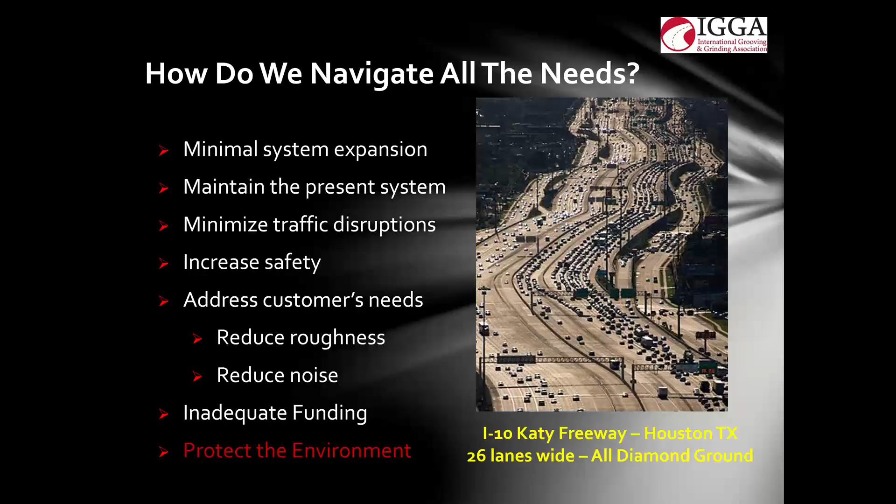In addition to that, while we're doing that, we're asked to minimize traffic disruptions, increase safety, make sure the customers are happy, give them a smooth road, a quiet road. And all the while, we're doing this with inadequate funding. And oh, by the way, yeah, let's protect the environment, which of course is quite important to all of us, I'm sure.

So many transportation departments are turning towards the pavement preservation philosophy, which is simply put, keeping good roads in good condition. And lucky for all of us, there is a robust toolbox full of tools that allow us to preserve our concrete pavement. And I'll just touch on them briefly before we dive into the grinding and grooving.

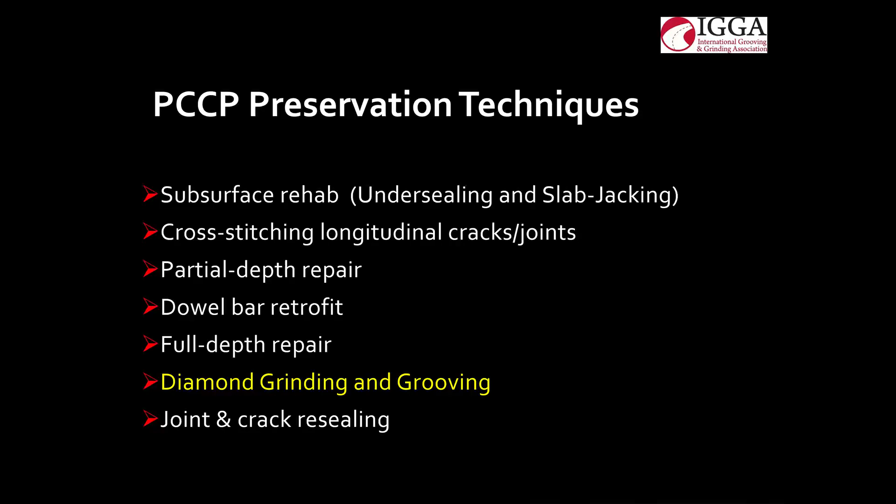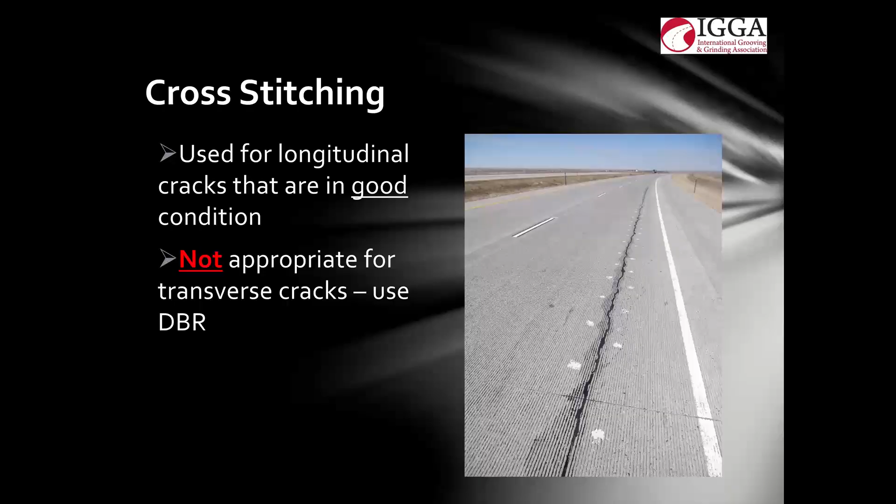There's pavement subsurface rehabilitation used for subgrade repair. There's cross stitching, which we use for longitudinal cracks that are in good condition. Note, not appropriate for transverse cracks. More on that later. Partial depth repair used on surface defects and joint spalls. Full depth repair we're all familiar with, removal and replacement of concrete, full depth.

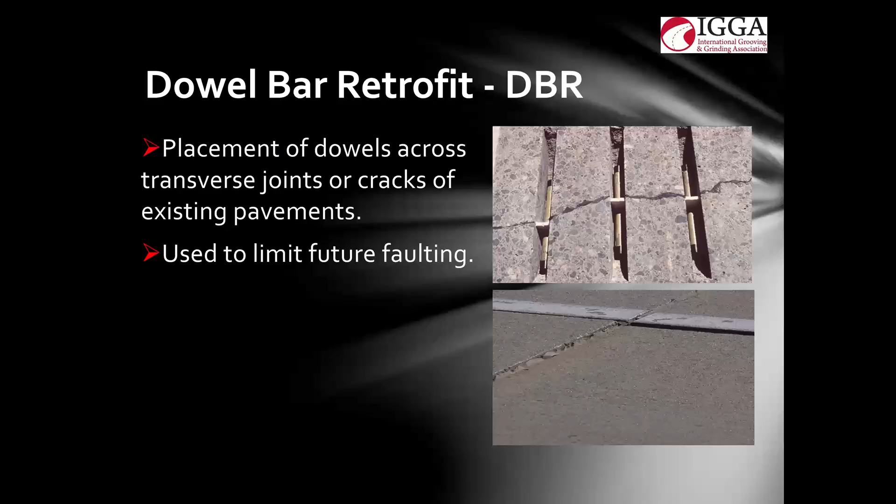And dowel bar retrofit, the placement of dowels across transverse joints or cracks of existing pavements used to limit future faulting. And then there's joint and crack resealing, which minimizes water and incompressibles entering into the pavement system.

Increasingly, we see specifiers using diamond saw cut surfaces to reduce roughness, noise, increase the friction, extend the life of their pavements, bridges, tunnels, and runways. And there's a number of reasons for that. It's economical, long-lasting, effective, and environmentally friendly.

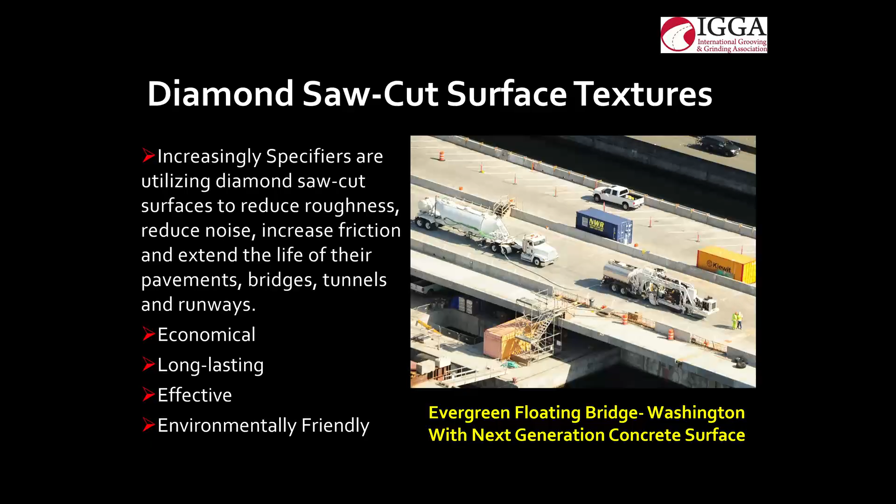Think about it, whenever we're using any diamond saw cut surface texture, we're not requiring any additional aggregate or materials coming from nature other than fuel. What we're looking to do is just simply refinish the top, make it functional, make it smooth, make it last long. There's three diamond saw cut surface textures that we tend to talk about.

Diamond grinding being the first, which is a process that ends up leaving a texture that looks almost like a corduroy fabric. It not only smooths out the pavement, but provides us with a low noise surface and increased macrotexture, making it a very safe surface when used on a good quality aggregate. And then there's the next generation concrete surface, which we really won't touch on here today in my presentation, but you will hear more about that later in the program.

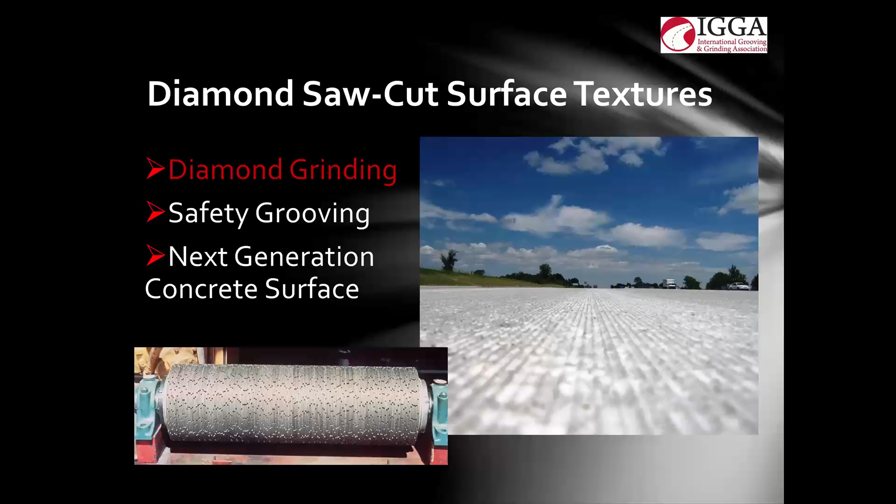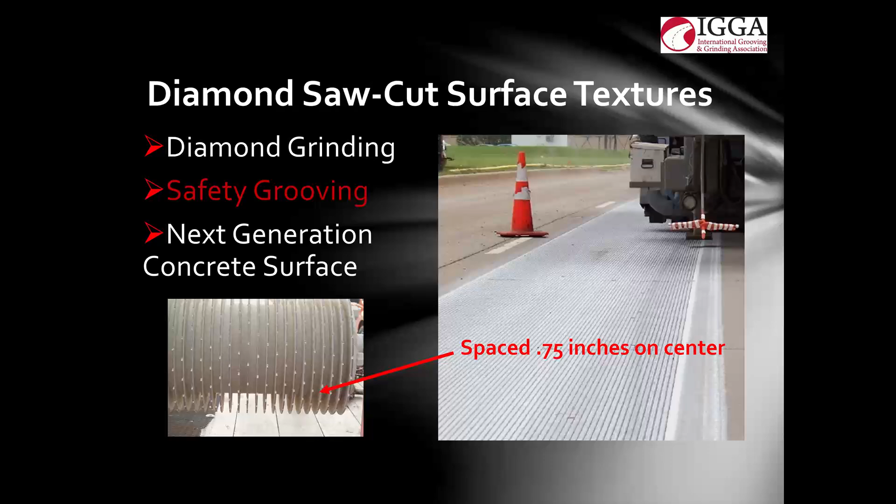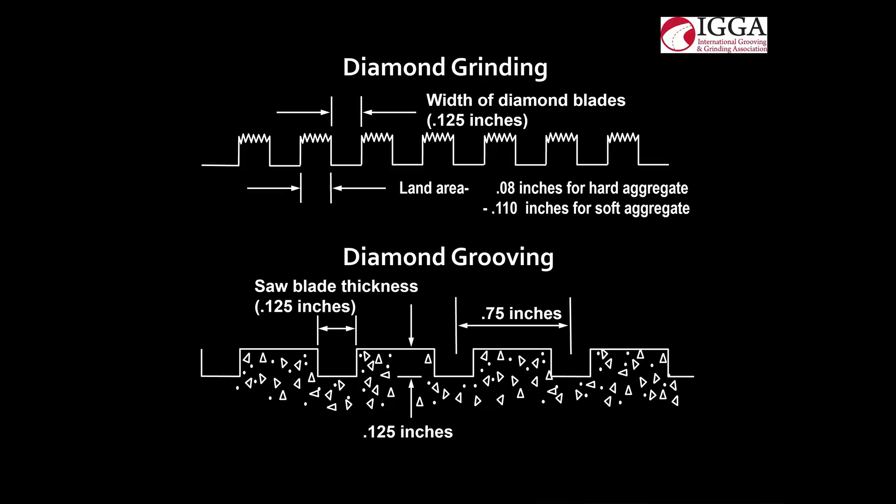And the concrete breaks off on a level surface, and hence we get the smooth texture, and again, the low noise signature and increased macrotexture, providing us with a safer roadway. If we look at the bottom of the cutout, we'll see diamond grooving. And again, you can see the 3/4 inch centers, the same blade, 125 thousandths about, but we're not impacting the land area, thereby not impacting the overall smoothness or the noise signature of the pavement.

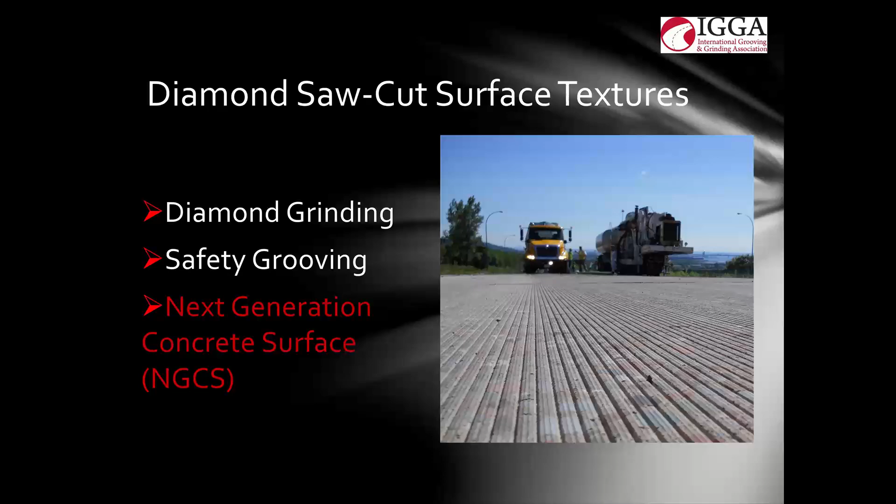And then there's the next generation concrete surface, which again is a topic you'll hear a little more about later in the program. And it's basically a hybrid combination of diamond grinding and safety grooving. So there's a lot of advantages to saw cut textures. The costs are competitive and really stable over time. The price has not increased greatly over decades.

It enhances smoothness, surface friction, and safety, and noise signature, all in the same pass. So whether you're looking for smoothness or you're looking for friction, you're getting them both. It can be accomplished during off-peak hours with short lane closures. And texturing of one lane does not necessarily require grinding of the adjacent lane. So you can take those scarce dollars that you have and focus them in the areas that really require the attention.

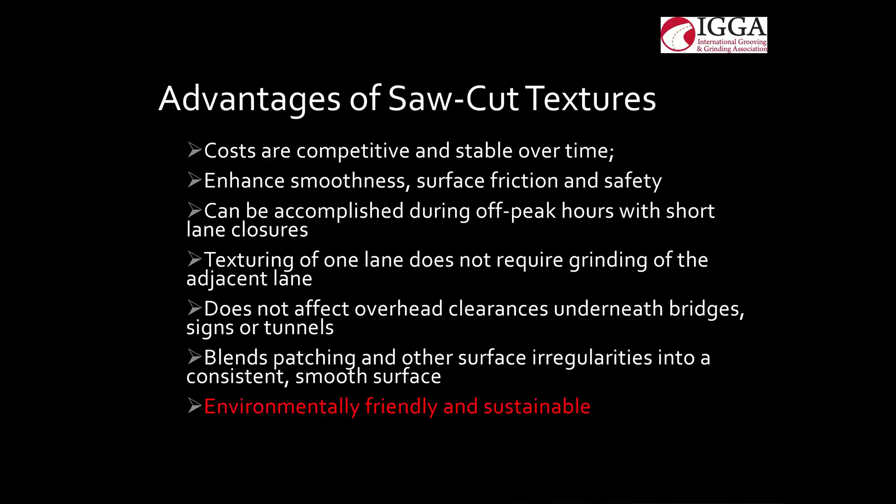The saw cut surface textures don't affect the overall overhead clearances under bridges or signs or tunnels, and it allows you to blend patching and other surface irregularities into a consistent, smooth surface. And as mentioned just a minute or two ago, it's environmentally friendly and sustainable. We're not ripping it out, we're not tearing it out, we're not putting something on top. We're simply going to refinish what we have in place.

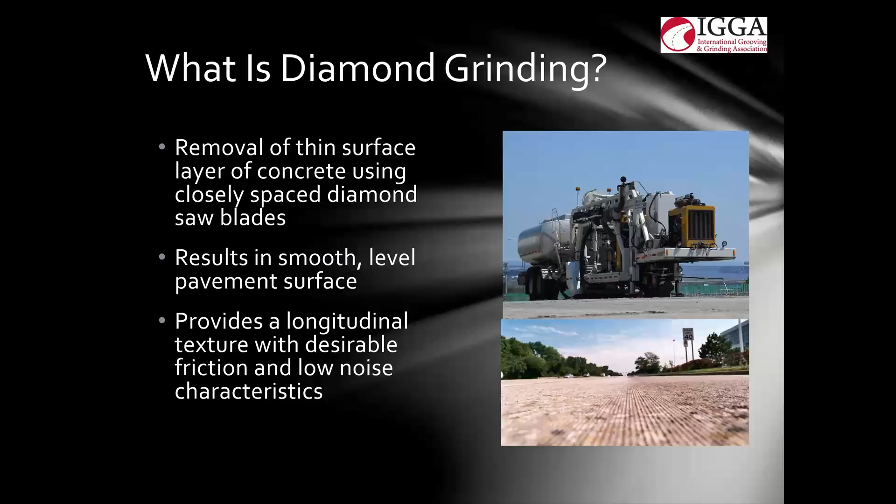So what is diamond grinding? It's the removal of a thin surface layer of concrete using closely spaced diamond saw blades. It results in a smooth, level pavement surface and ends up with a longitudinal texture with desirable friction and low noise characteristics. There's a number of problems that can be addressed using the diamond grinding process.

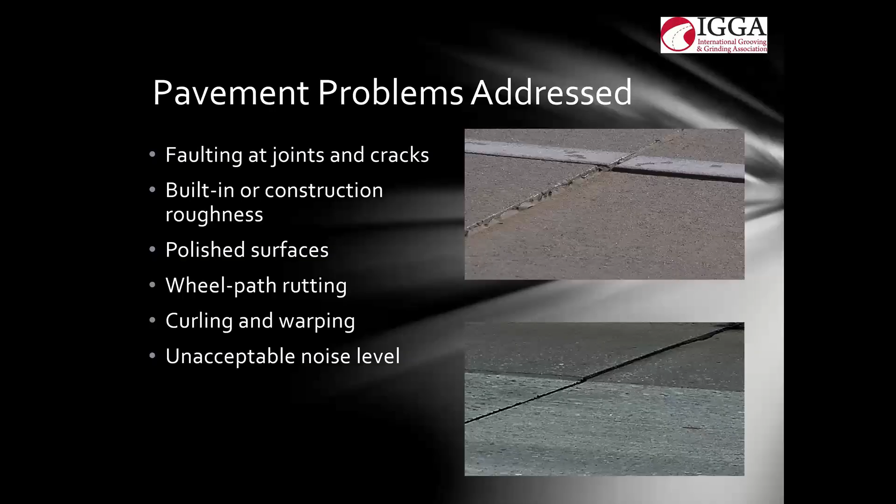You can also grind out built-in construction roughness, or increase the macro texture of polished surfaces. You can remove wheel path rutting, address curling and warping, and again, unacceptable noise levels.

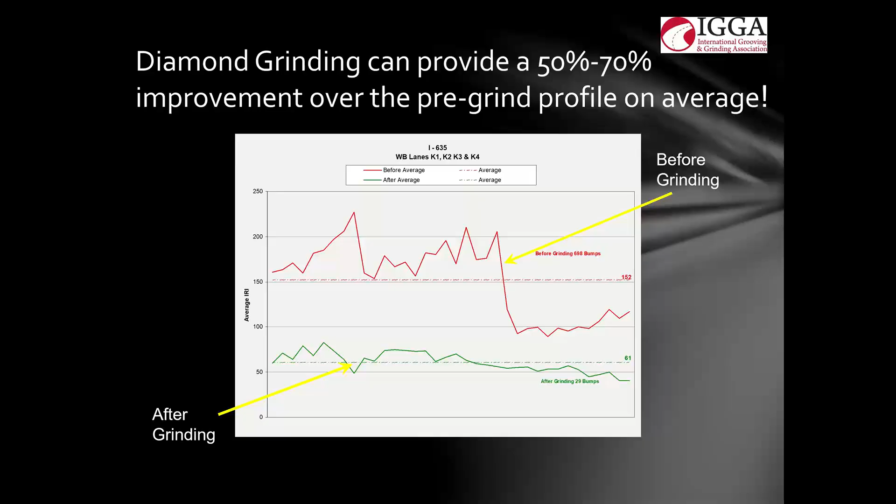There was an average roughness of 150 and change. After a single pass of diamond grinding, full lane width, you can see that they reduced the IRI down to an average of 61 inches per mile. That's about a 61% decrease in the amount of roughness on this pavement, without any patching, without any other treatment, simply diamond grinding.

Looking at it from a network perspective, the Kentucky Transportation Cabinet did a real nice job. Over a 5-year period, they employed diamond grinding to reduce the IRI of their interstate concrete pavement. Over those 5 years, they went from 112 inches per mile down to 74.5. That's about a 33% decrease in the roughness of their pavement, giving back to the driving public and to the pavement itself by reducing the amount of dynamic loading taking place on those sections of concrete.

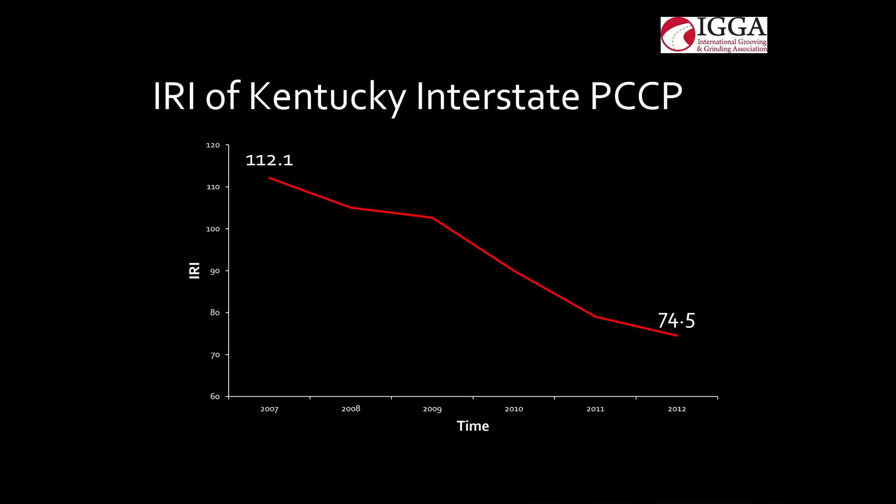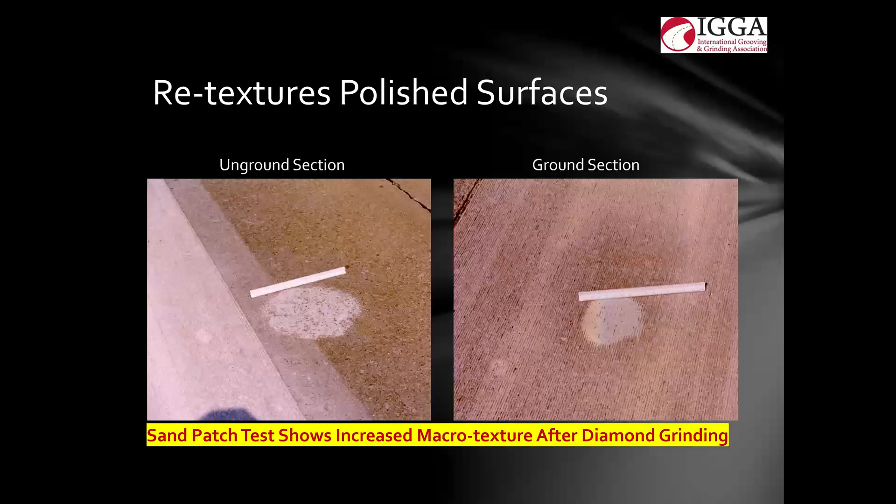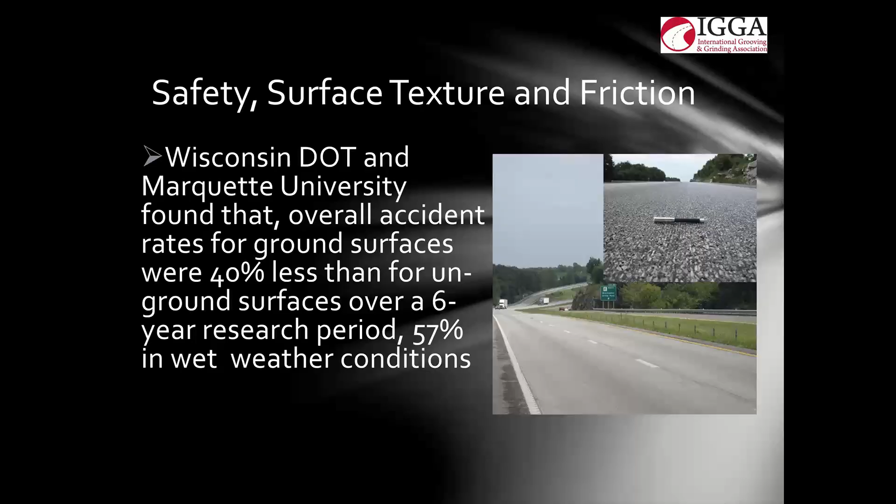If you look at some of the reports on our website, Wisconsin DOT and Marquette University found that overall accident rates for ground surfaces were 40% less than for unground surfaces over a 6-year research period, and 57% less in wet weather conditions.

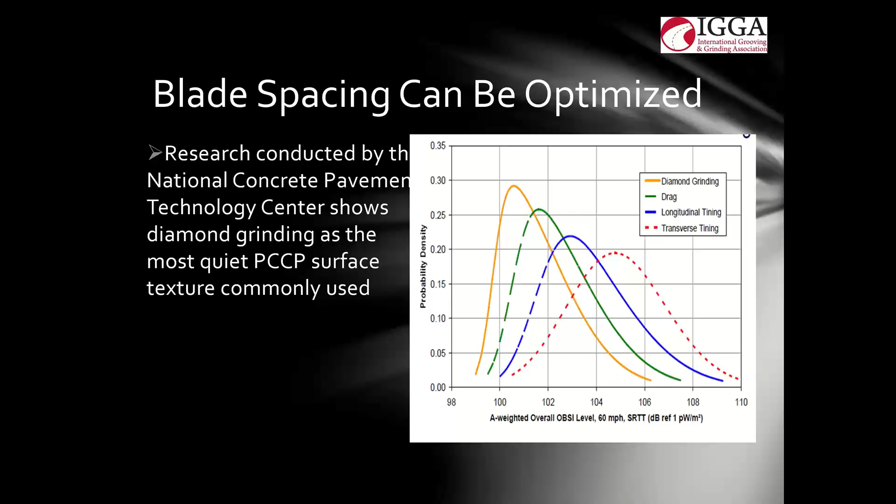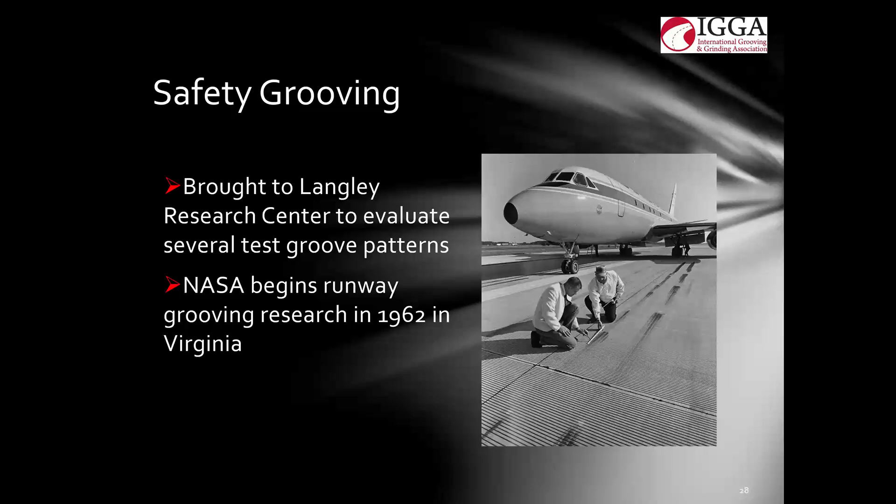Let's take the last minute or two to talk about safety grooving. Grooving really gained traction when it was brought to Langley Research Center to evaluate test groove patterns for runways. NASA became curious and began its own runway grooving research in 1962. Shortly thereafter, Caltrans began using safety grooving in 1963 for wet pavement accident reduction.

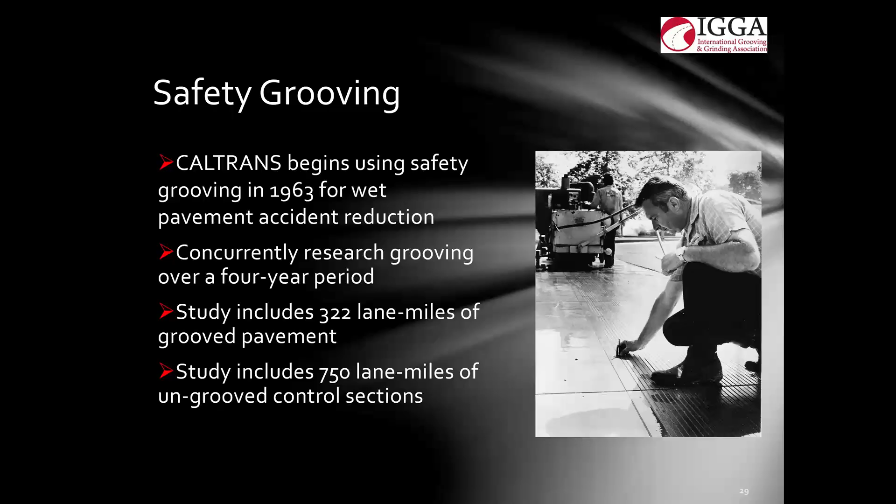Concurrently, they ran a research grooving project over a 4-year period that included 322 lane miles of grooved pavement and 750 lane miles of ungrooved control sections on concrete pavement.

I know you can't see the text here, so I've blown up the most important part. At the end of this research effort, here are the findings: a 20% reduction in total accidents, a 50% reduction in fatal accidents, and a 70% reduction in wet pavement accidents. All the while, there were no issues with motorcycles or light vehicles impacted by this groove surface. Again: 20% reduction in total accidents, 50% reduction in fatal accidents, and 70% reduction in wet pavement accidents, all from a simple groove.

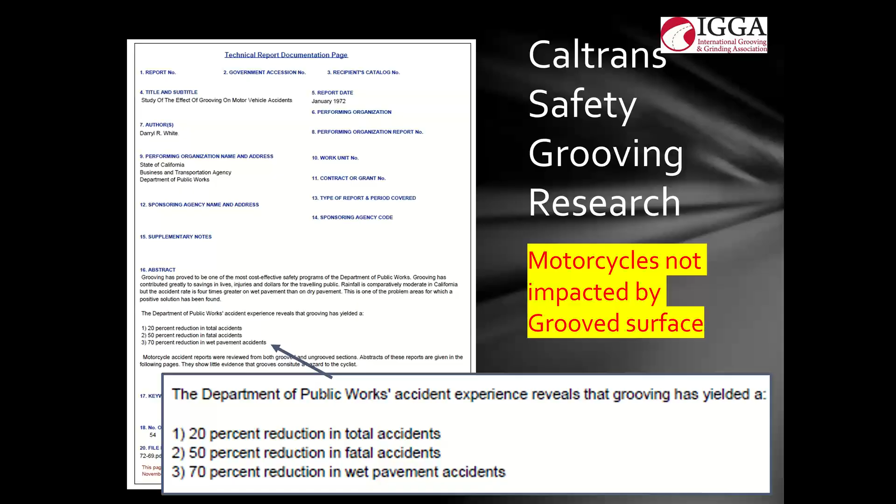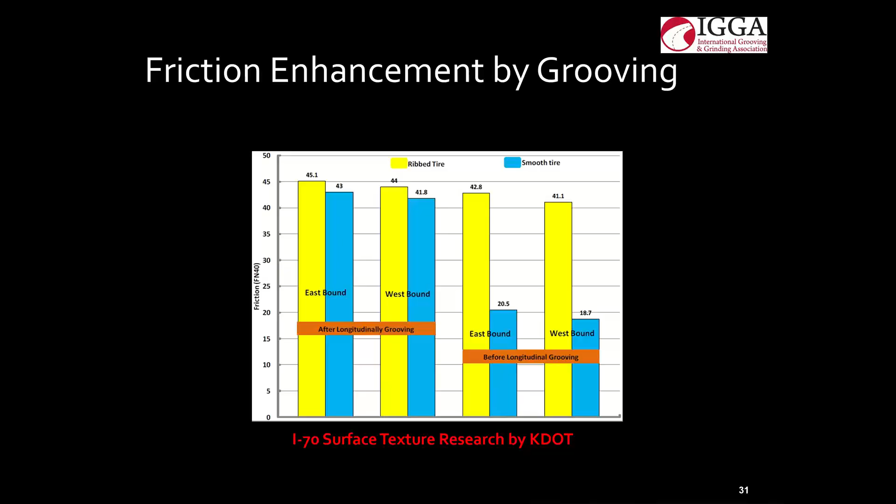The blue shown on this slide represents the smooth tire, which best represents wet weather characteristics. The right side bars show conditions before longitudinal grooving. Focusing on the smooth tire, wet pavement characteristics, you can see a friction number of about 20, give or take. Now on the left side, after longitudinally grooving that same surface, you can see the friction number has more than doubled, over 40 on both eastbound and westbound. So longitudinal grooving is tremendously successful in reducing accidents due to the increased macrotexture it provides.

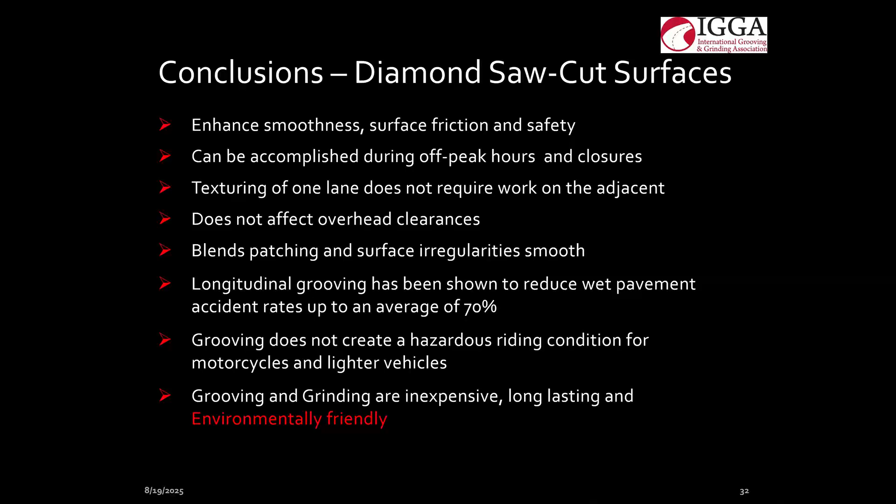In conclusion, diamond saw cut surfaces provide many benefits. They enhance smoothness, surface friction, and safety. It can be accomplished during off-peak hours and closures. Texturing one lane doesn't necessarily require work on adjacent lanes, and it doesn't affect overhead clearances. It blends patching and surface irregularities smooth. Longitudinal grooving has been shown to reduce wet pavement accidents up to 70%, and it doesn't create a hazardous riding condition for motorcycles and lighter vehicles. Grooving and grinding are inexpensive, long-lasting, and environmentally friendly.

The other thing we've seen in the past is cases where wire mesh is shallow, but it's not actively causing surface spalling. In those cases, we'll still advance it as a CPR project frequently, but we'll often omit the diamond grinding to not take any more cover off of that mesh and cause further issues in the future.

The other thing we'll look at is our drainage profiles, cross slopes, all of that. As long as we're not altering any of that, we'll include the diamond grinding. But if we have a project with a lot of drainage structures, utilities in the roadway, we'll also omit the grind and just go to a bump grind to address the repair areas and feather those in, but not do a full production grind on that project.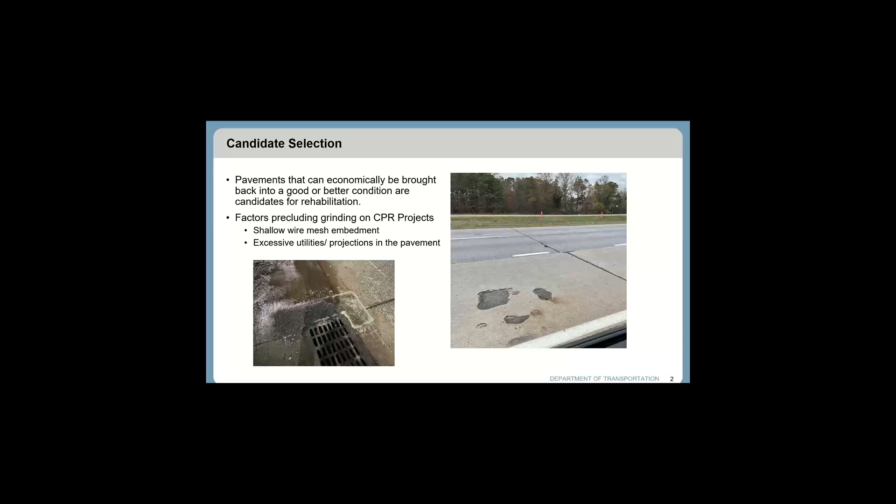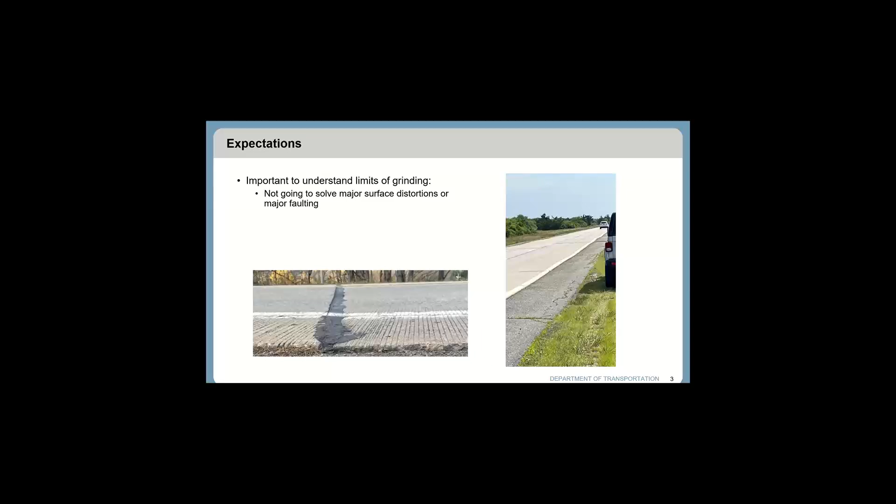I think the most important thing with including diamond grinding is just to understand the limits of it. Major surface distortions such as major faulting, major undulations in the pavement, those will not be completely taken out even with a deep grind. We always try to address these with our internal design groups when we're pushing these projects forward so that they are all aware of what they're actually getting out of this, because diamond grinding is another treatment and it's not the end-all be-all of everything.

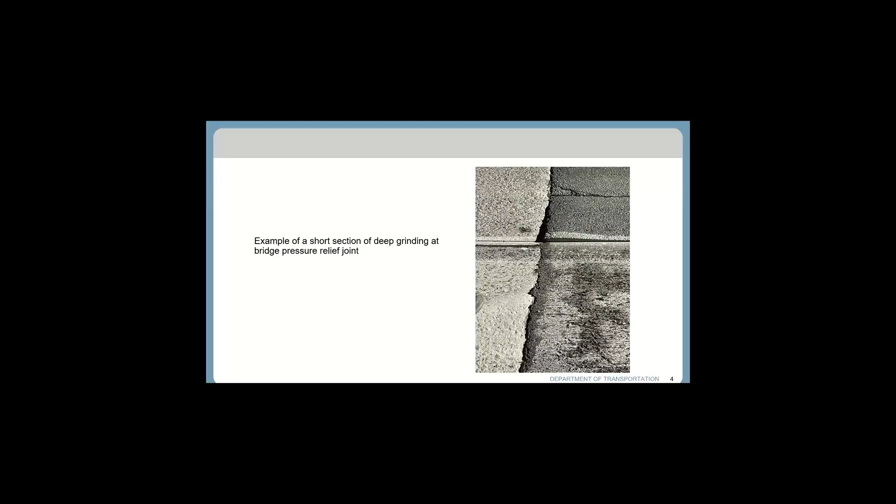So here's an example of a deep grind that we did at a pressure relief joint where quite a bit had to actually be taken off to bring that level with the pavement. For an isolated area, we're good with these deeper grinds, but if we're going to be removing a lot from the pavement structure across the whole project, we would look at alternate treatments rather than taking inches off of the pavement itself.

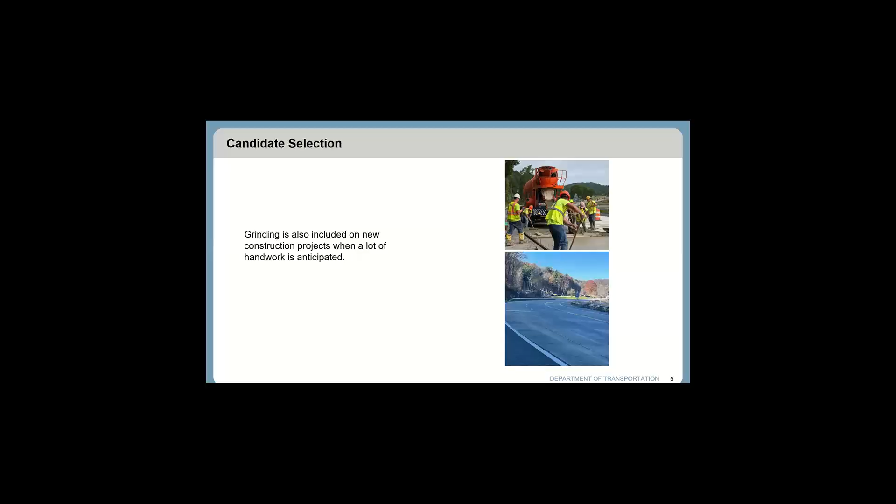One last thing I do want to mention is for us with new construction, a lot of our projects are very short projects where we anticipate a lot of handwork. And on those we'll also include the diamond grinding, just to smooth everything out to the same plane, since handwork doesn't really have the same smoothness as a machine-placed pavement.

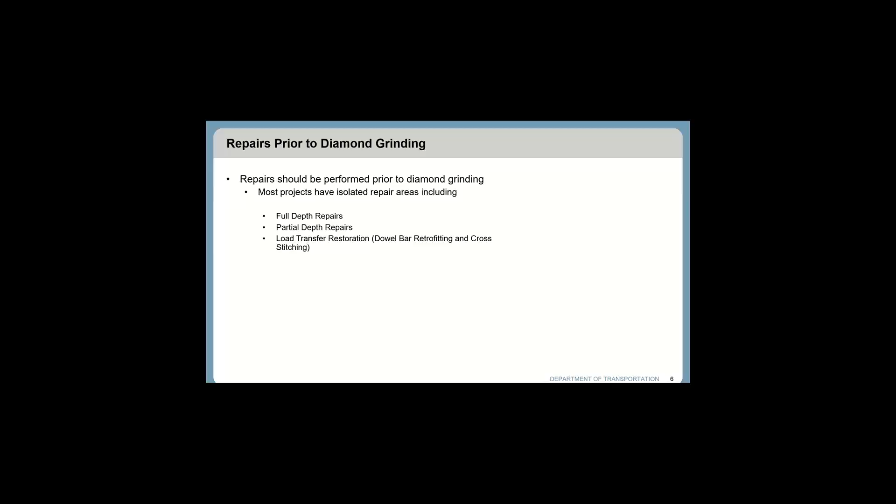So now I want to get into some of the repairs that we'll address before we actually perform our diamond grind. The biggest thing we're trying to do with these diamond grind projects is improve the ride quality of these pavements and get that to last for as long as we can. So if there's major spalling, shattered slabs, or faulting, those will continue to impact the ride of the pavement after the grinding is performed. And also any cracks may fault in time, which will also impact the ride long term. So we want to address all of those.

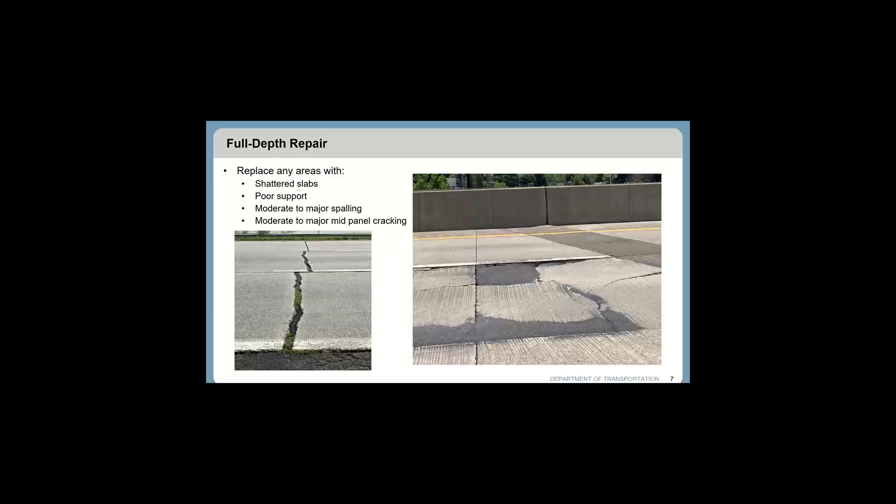The other thing is moderate to major mid-panel cracks. Minor mid-panel cracks we will address through dowel bar retrofits, but major cracks we will always do a full depth repair at, to make sure that those don't move in the future and cause additional roughness in that pavement.

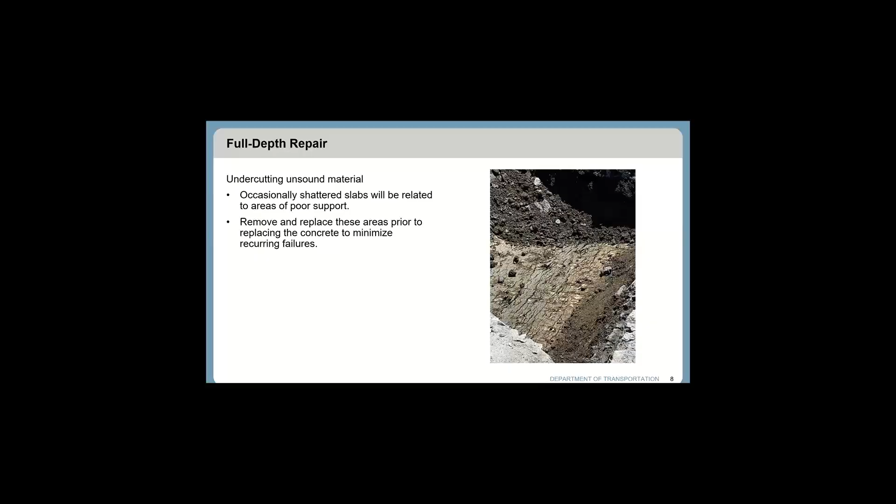If we have an area with major shattered slabs or major faulting, we want to always get into what the underlying cause of that is. If we can address that economically, we will undercut and replace that with sound sub-base materials, which solves the issue of recurring repairs at that location.

Once we perform our removal, we will always reestablish our transverse joints, which also helps prevent faulting at that transverse joint face. Most of the time we'll place 4 dowels in each of our wheel paths, unless we're in a spot where traffic is crossing the lane, changing lanes frequently. In that case, we'll increase the number of dowels to make sure we have full coverage across the lane.

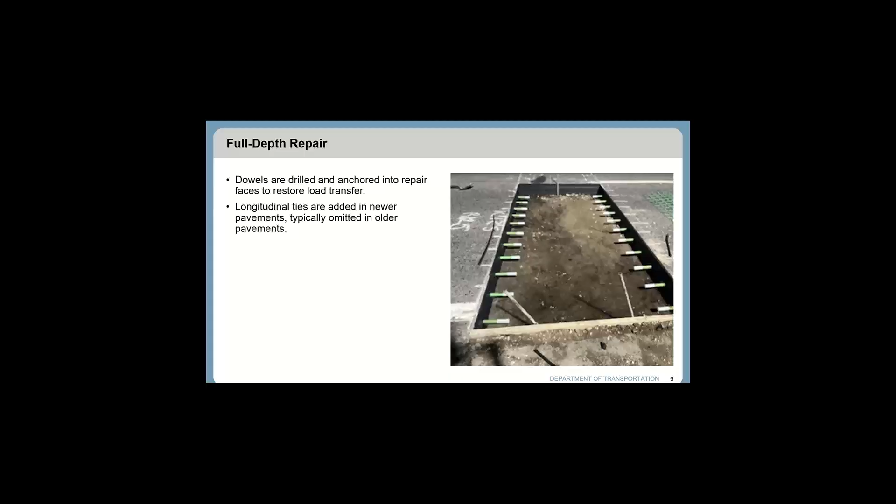Additionally, for longitudinal joints, a lot of that decision making comes down to pavement age. For a lot of our newer pavements, built in the last 35 or so years, we will reestablish that longitudinal joint using joint ties. But we also have a lot of 70-plus-year-old pavements where it just doesn't make sense given where they're at in their service lives to reestablish that longitudinal joint, so we will often omit the ties in those pavements.

Moving past full depth repairs, the other repair type in our toolbox before we perform this grind would be partial depth repairs. These are appropriate for smaller spalls. What we find is that mastic in particular works really well at our pavement joints. The one issue we've had with mastic is that when we grind through it, if the repair gets too large, the head can kind of catch and pull at that mastic a little bit. So for that, we try to limit our repair sizes so that the machine head is never fully resting on the mastic while it's going through the pavement.

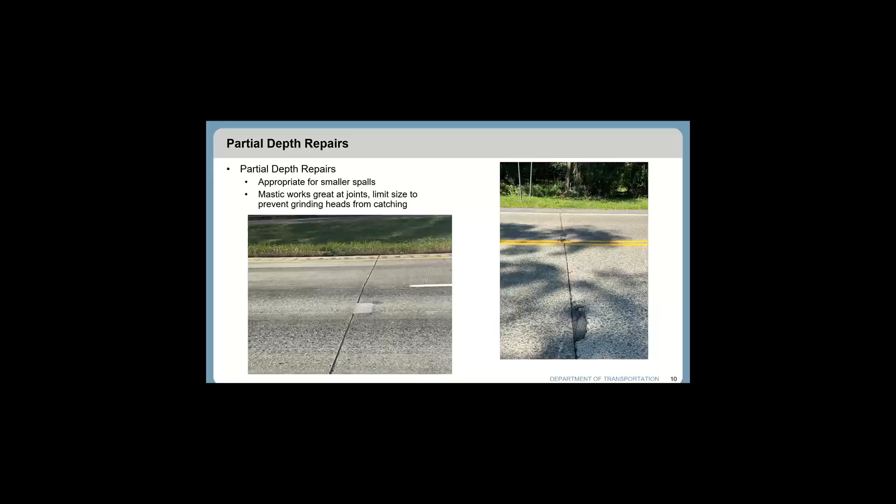A couple things we always try to address when performing partial depth repairs: if we're using a cementitious material, we avoid letting it enter our joint or a crack. The photo on the right shows a repair that failed from entering the joint, basically failing in compression. It's one of those things where you finish your grind and everything, and then you're going back out there throwing cold patch on. Nobody wants to be doing that. So addressing that early on in the project and making sure those materials are used appropriately is important.

The other thing worth noting is knowing the limits of your partial depth repair. If you're getting into a situation like on the left here, where you have dowels coming out of the pavement and you're going full depth, you want to really revert that to a full depth repair. Again, because you don't want a temporary fix that gets you a couple months before you're out patching it again.

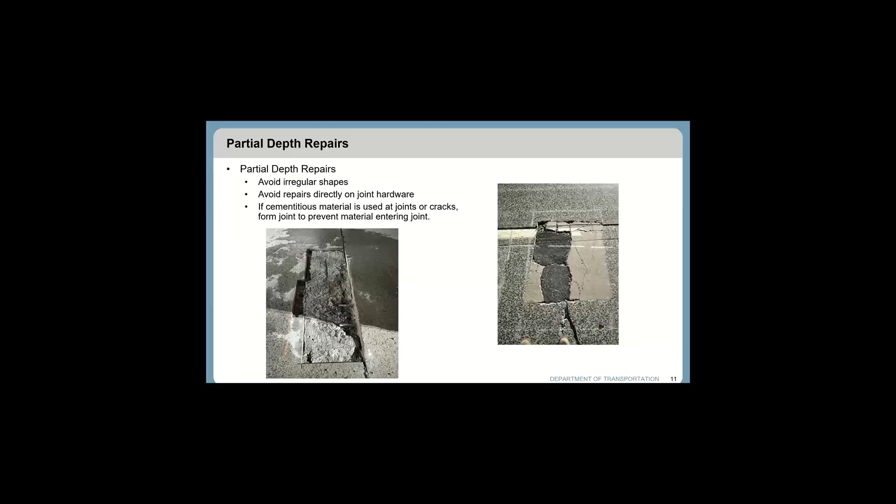Next is addressing minor cracks. We'll use dowel bar retrofits for a lot of those, since it's not necessary to go through and perform a full depth repair all the time. The dowel bar retrofit works great for minor cracks where you still have good aggregate interlock but there's just not that joint steel, and this really helps long-term with the rideability of these pavements by preventing the joint from faulting again.

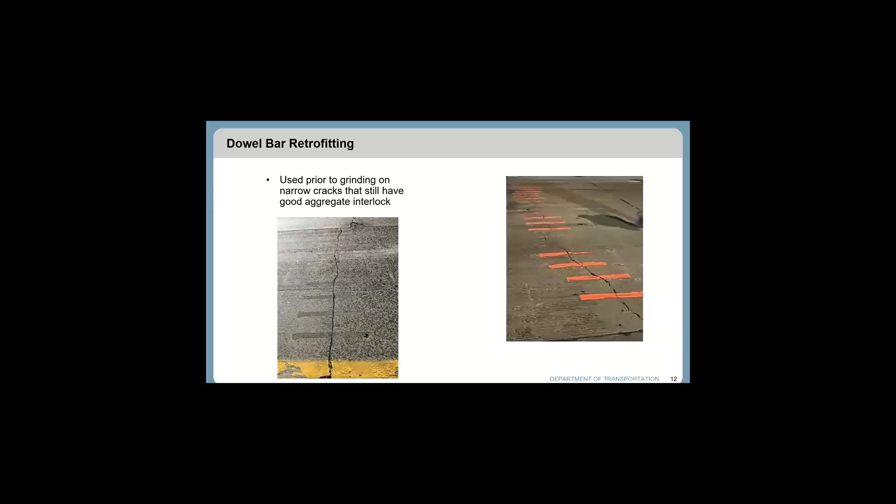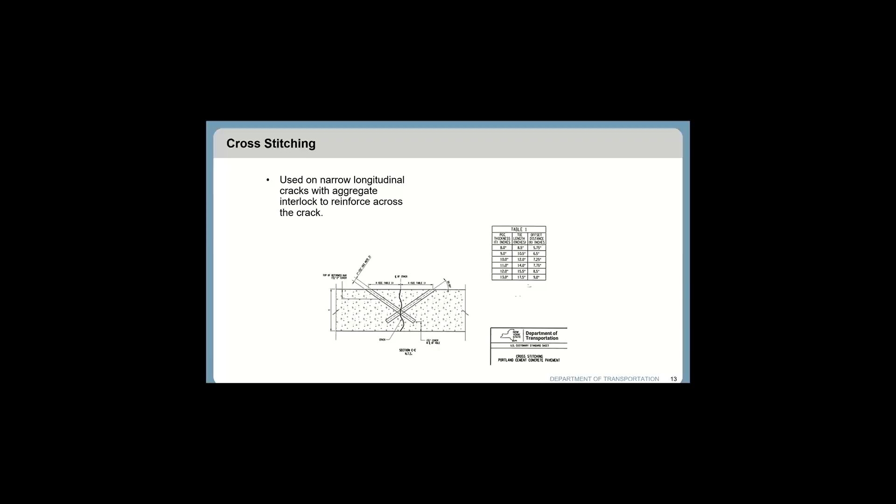Same thing with our longitudinal cracks: if we have a crack that's tight longitudinally and still has good aggregate interlock across it, we'll often employ the cross stitch technique to hold that crack together, keep it from opening up, and keep it from settling across that crack over time.

The last thing I want to mention is joint resealing. This is another thing we typically perform on our projects. It's important that this is done after the grinding is done. When we do our diamond grinding, we require 95% of the pavement surface be surface ground. When they're going across joints, a lot of times the head will catch the joint sealant material, pull it up, and move it around, so it won't be an effective seal anymore. So we want to do the reseal after the grinding is performed so that we have effective sealant in our pavements.

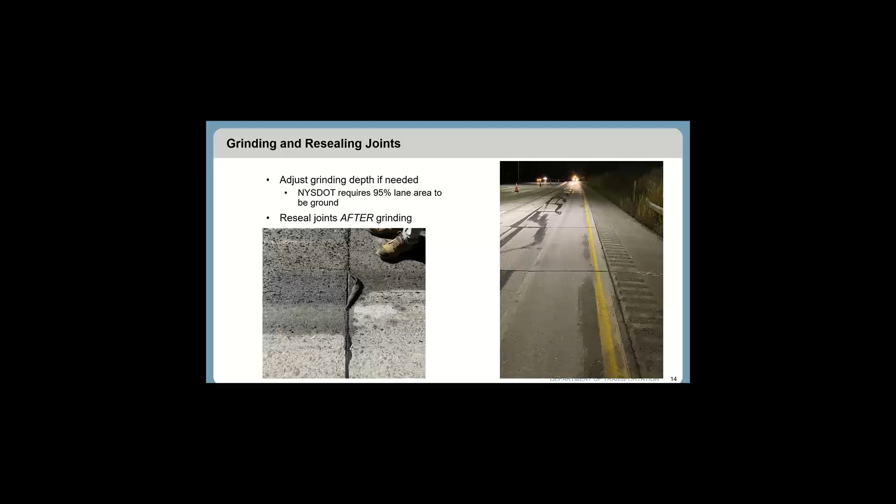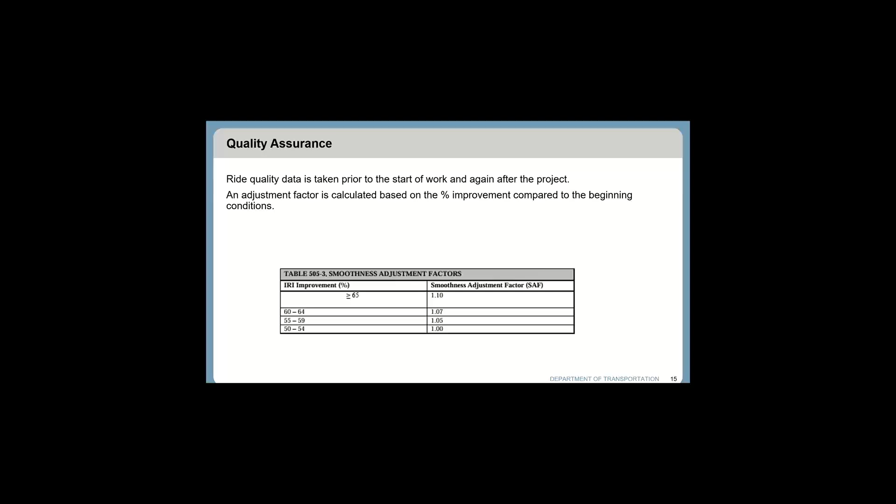The last thing I want to touch on is our expectations for our rehabilitation projects. We operate our diamond grinding as a percent improvement spec. We'll profile the pavement before any repair work is performed, and then again after the grinding is completed, and compare the results of those two. We're expecting at least a 50% improvement. If we see anything over 55% improvement on the ride for that project, we'll get into an incentive adjustment for that ride quality item. That's all I have today, but thank you guys for listening.

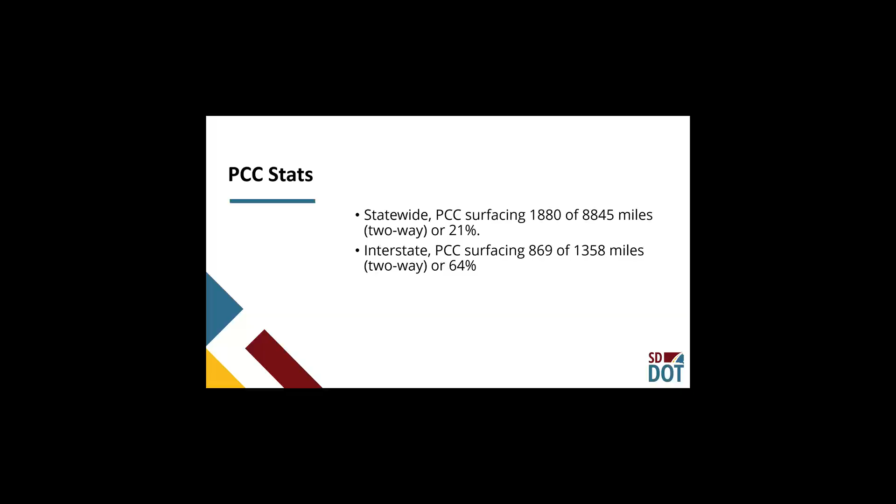PCC preservation treatments are considered in the state's pavement management system. These include 3 distinct treatments, applied either standalone or in combination: joint and spall repair, which we classify as minor or major. Minor is where we have less than 40% full depth repairs; major is greater than 40% full depth repairs combined with partial depth repairs for joint spalls. We also do diamond grinding, and part of the prep for that is minor joint and spall repair, followed by sawing and sealing of joints after grinding.

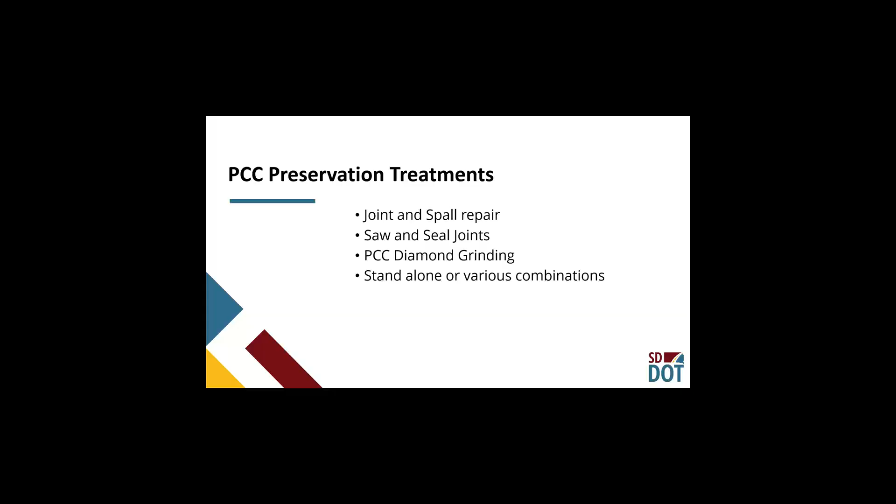So over the years we've had great success with these treatments until we encountered issues on I-90, the stretch from White Lake to Mitchell, South Dakota. The PCC between White Lake and Mitchell was built between 2009 and 2013, much of it built in a hurry during the ARRA, or economic stimulus, era.

Shortly after this was done, we received a call from someone in our research office. He was riding in a 1-ton utility truck and was getting bounced and rattled so much that it was spilling his coffee. Lesson 1: never spill a researcher's coffee. Lesson 2: we discovered that warping and curling had developed. This was kind of a nightmare.

This was most noticeable for certain wheelbases, such as trucks and trailers, like pickup trucks pulling boat trailers, among other configurations. But if you were driving a normal passenger car, you could hardly feel it. It was almost like a sympathetic vibration.

What happened to develop this warping and curling? Basically, jointed PCC pavements are constantly moving and changing shape during and after construction. Getting into the science of it, the exothermic reaction of cement hydration expands the volume of the concrete, so as cooling occurs, the slabs decrease in volume.

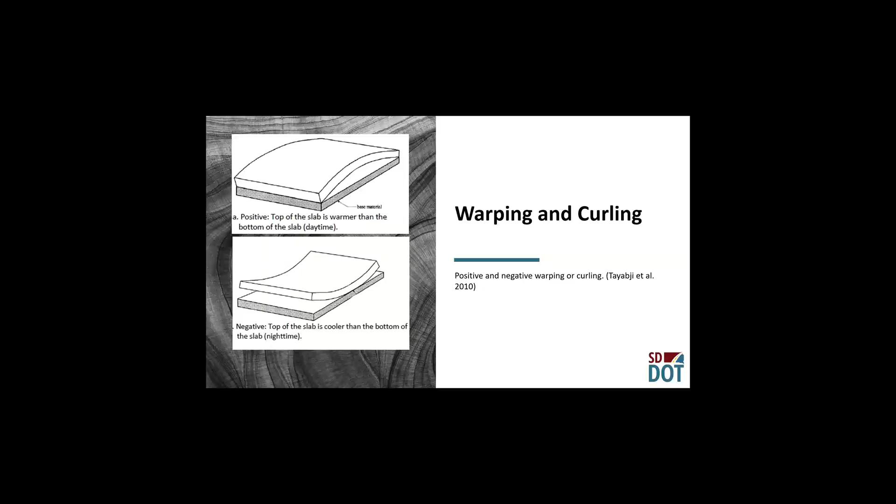Now, with environmental conditions, if they're just right, the use of cures, if they're not used just right to minimize evaporation, and then you look at reflected sun with the cures, dictate if curling or warping settles in or not. And in the case here, we're not sure what the cause was, if it was the cures, if it was a wet season that we had that particular year when we were building it, but things did not go right.

So the warping and curling is magnified or lessened by temperature changes during the day. Not only that, as the concrete ages and the slabs shrink, the curling will become even more exaggerated. This presents some pretty significant problems when you try to grind this pavement.

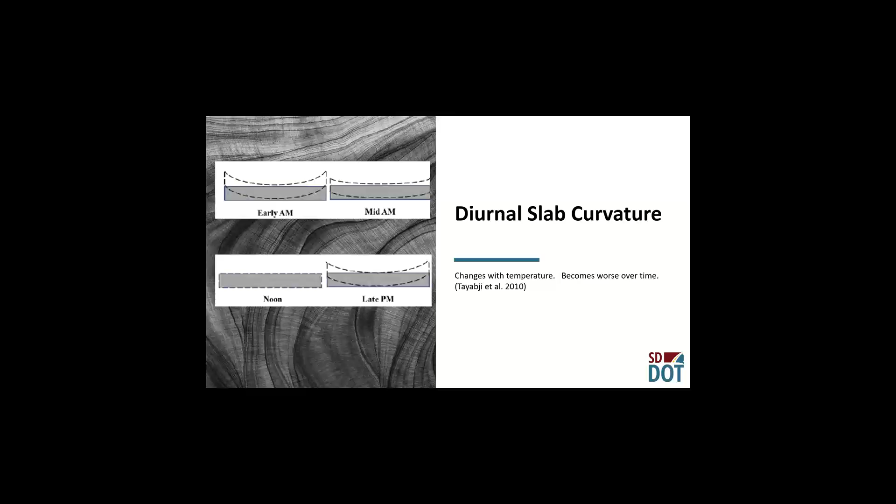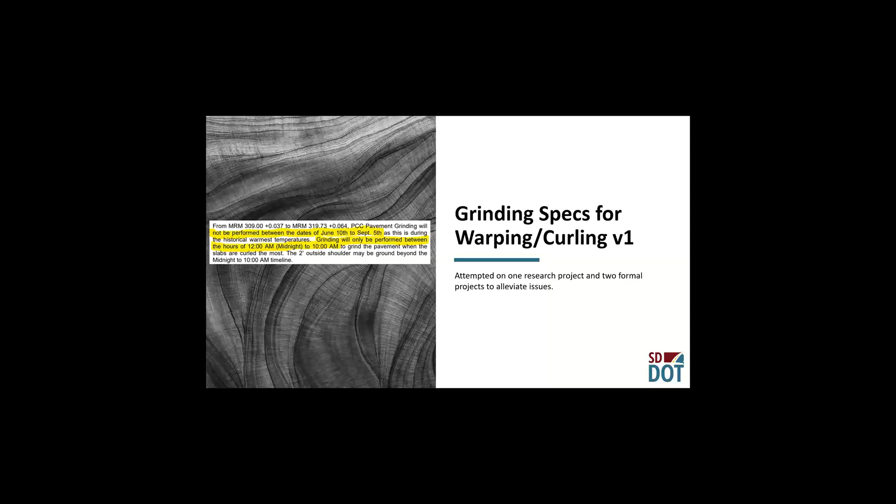And then grinding will only be performed between the hours of midnight to 10 a.m. So this is so that you could capture the time when the slabs were curled the most. So this caused the mobilization costs for grinding projects to be driven up. And as I said before, contractors and even DOT personnel were not very happy with that spec.

So State Research Project SD 2022-07 is a formal research project that was opened to follow up with version 1 of this project. We wanted to see if the specs made much difference from the first version and what we could change. Detection of warping and curling in the profile data is also important in being able to properly model and perhaps add treatments or the triggering of treatments to the pavement management system so that we can properly program grinding treatments before they become too rough.

Perhaps there is another treatment out there besides grinding, or maybe another version of grinding. That's kind of what we're trying to find out. Tentatively, the results of this research are to be tested in a project in fiscal year 2026. This also has implications with our new designs for other PCC pavements as well as preventive maintenance.

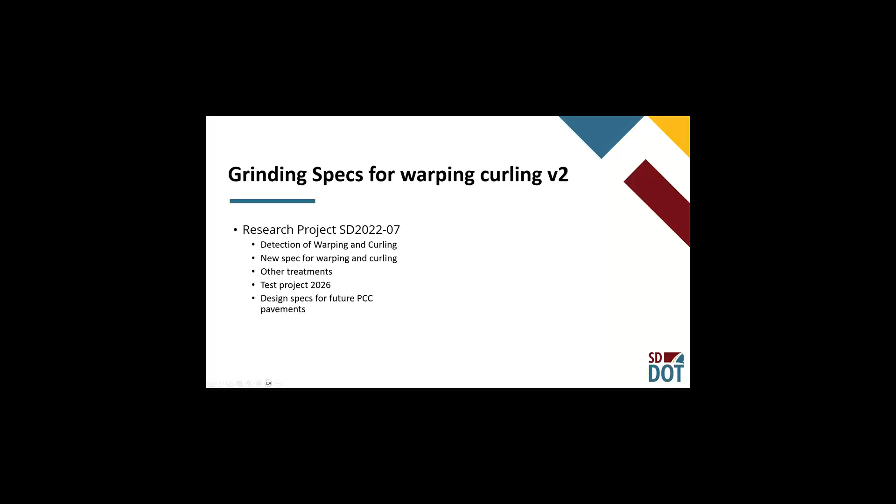Kind of goes without saying, and not pointing any fingers at any contractors or consultants or anything like that, but what it comes down to with this particular problem, if it had been built correctly in the first place, we probably would not have seen this issue. So with that being said, that is all I have. It is hoped that our research project with NCE will yield a favorable treatment spec for this issue.

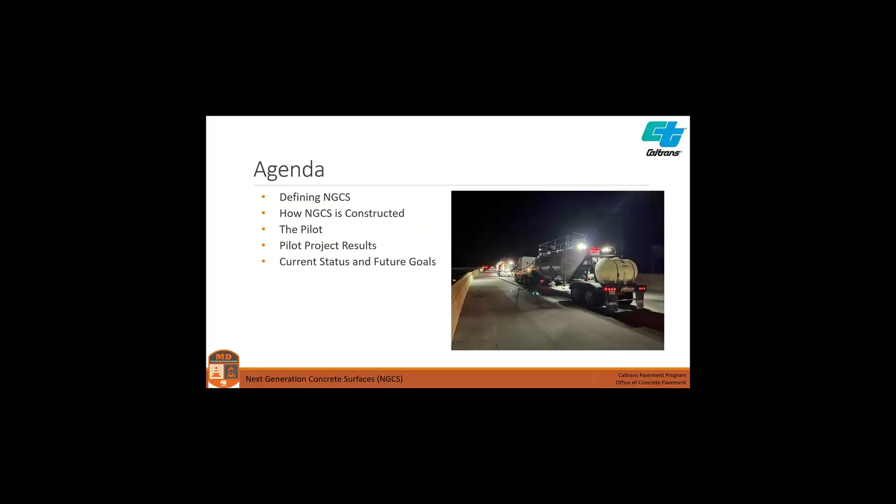So real quickly, just to go over the topics of discussion for today, I'm going to start off by defining what next generation concrete surfacing is. I'll go over how it's constructed and the specifics on the order. And then I will go into the pilot project that got it all started in California, and then focus a discussion on the results of that pilot project and what those results meant for us. And lastly, I'll talk about the current status and our future goals here at Caltrans.

So NGCS, what is it? NGCS stands for Next Generation Concrete Surfaces. It was developed by the International Grooving and Grinding Association, along with the American Concrete Pavement Association and Purdue University. And it is a specifically engineered texturing technique, grinding and diamond grooving in a specific order, in a specific manner, as we'll see later. And it was developed to reduce tire to pavement noise, create smoother pavements, and increase durability.

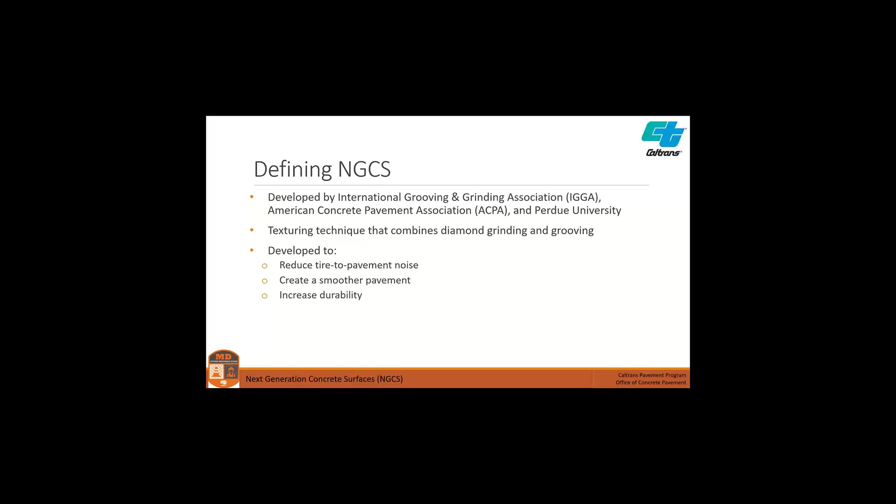On most high volume, high speed roadways, noise emissions are predominantly caused by the interaction between the vehicle tires and the pavement surface. And these high levels of noise can be irritating not only to the people in the vehicles, but the surrounding community. NGCS addresses that concern and creates a much quieter concrete pavement for the traveling public and the community.

So how is it constructed? Well, first you'll start with a diamond grind. Another way to say it is the flush grind. And this step is to remove any irregularities like bumping or faulting, as we discussed earlier, and creates a smooth flush surface for the following steps.

The next step would be surface cleaning. This step is very important as dust, dirt, oil, rubber, anything on the surface can clog the diamond grinding blades, and this can reduce the cutting efficiency and cause uneven grinding and grooving. A clean surface ensures that there's consistent contact of the blades and the surface of the pavement, and it maximizes the life of not only the grinding equipment, but ensures a uniform surface texture for the traveling public.

Following the cleaning, you'll get into the diamond grooving portion of the construction. And as we've already discussed, diamond grooving creates these longitudinal grooves. For NGCS, they're typically about 1/8 to 1/4 inch deep, about maybe 1/2 an inch apart. These aren't set in stone numbers, but on average, that is what we do here in California.

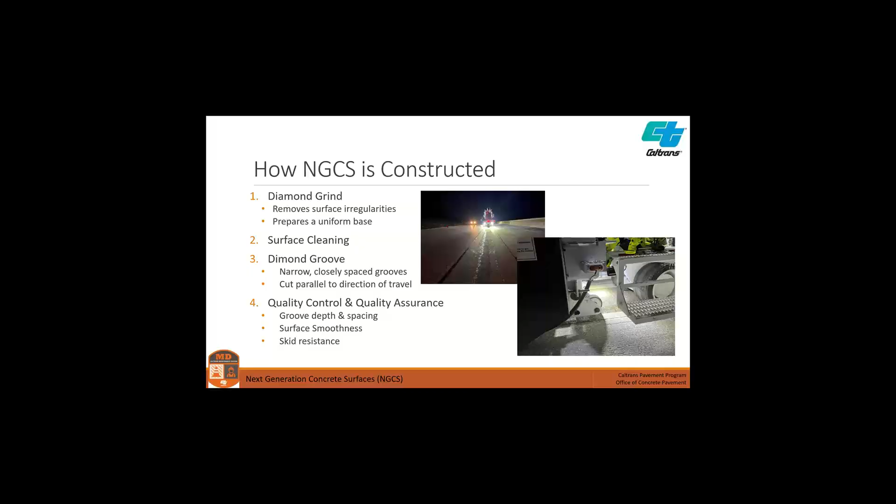And then last but not least is your quality control, quality assurance. And this is basically to meet the performance goals. You'll check things such as the groove depth and spacing, surface smoothness, skid resistance, and you ensure that the final product meets the specifications for your state and provides a quality product for the traveling public, which is important.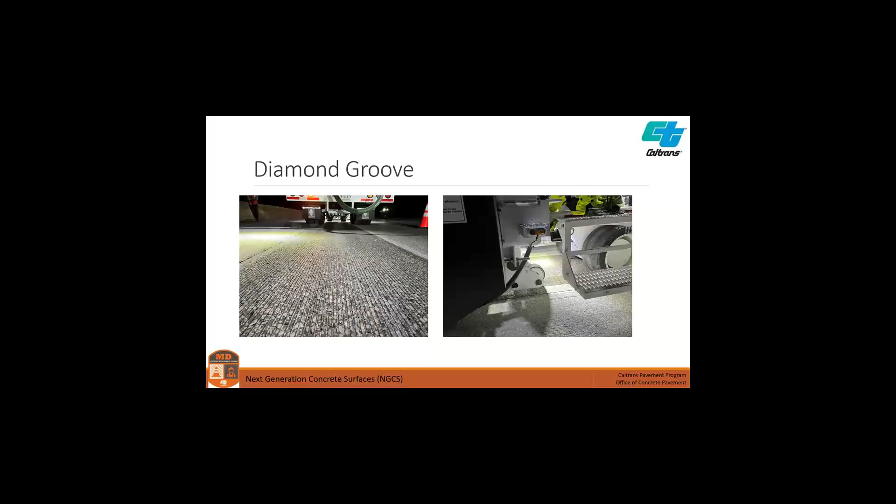So moving into the pilot project. The pilot project in California was constructed in 2011. It was on I-5 near Solana Beach, north of San Diego. And what they did here was they performed conventional diamond grind on about 10 miles of roadway in both directions, all lanes. And then they went through and performed NGCS on multiple different 1 mile long test sections. Again, both directions, all lanes.

The pavement that they performed this NGCS on had construction dates varying from 1960 to 2000. So basically the NGCS was performed on pavements that were anywhere from 10 to 50 years old, all structurally sound. A little more information, the average annual daily traffic was just under 150,000 with approximately 5,600 trucks. And data was collected before conventional diamond grind, after conventional diamond grind, and then after the NGCS. And they evaluated the smoothness, noise level, and surface friction.

Smoothness, because that directly contributes to the ride quality, improved fuel economy, reduced emissions, as well as so many other factors. Noise, as reduced noise was one of the primary goals of NGCS. And then surface friction, because that directly contributes to the driver's safety.

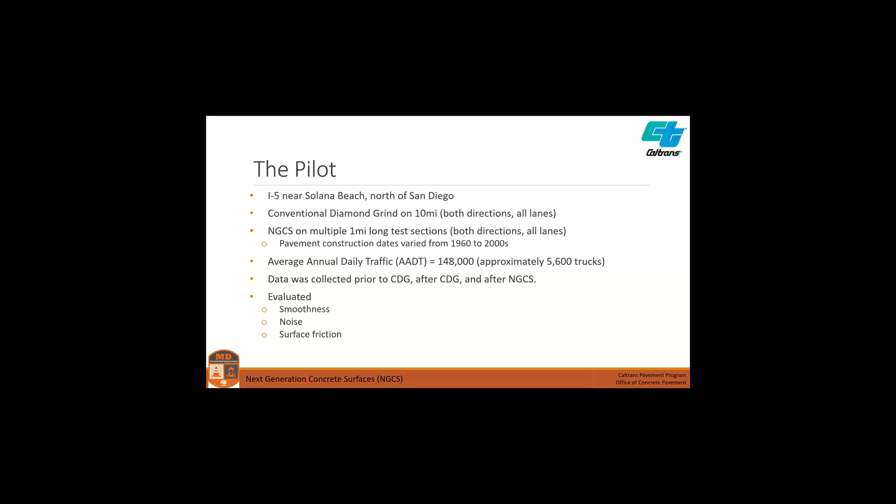So here are the results. The first column is your roughness factor. The second column is the noise levels, and the third and fourth columns are the friction levels. So starting off with roughness, you can see that the original pavement had an IRI of 158. After conventional diamond grind, that was reduced down to 60. And we already saw how conventional diamond grind does reduce roughness by approximately this amount. In this case, it was a 60% reduction.

Now, NGCS specifically reduced that roughness by another 20 points, which led to a 76% overall reduction from the original pavement. And this number is comparable to high quality new pavement. So very great pavement. The next column is the noise levels measured in decibels.

And at first glance, this may not seem significant. 105.2, 103.2, 100.7. That doesn't vary very significantly, but the thing to remember is that the decibel scale is logarithmic. So these numbers are misleading, okay?

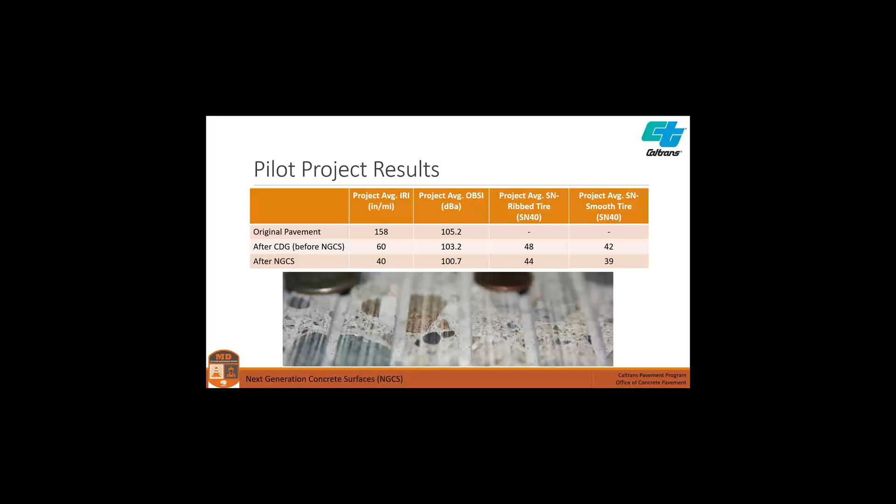So what did this mean for California? Well, basically, the results were overall positive. We saw that NGCS had positive impacts on smoothness, noise, and surface friction. So currently, here in Caltrans, we have at least 9 projects that have implemented NGCS since the pilot. Now, this number is probably larger for sure, because we don't have a database of projects that utilized NGCS. These 9 projects are projects that are known to me to have used NGCS. So again, it's probably a lot more than that.

We're continuing to monitor noise sensitive areas with NGCS to see its effects, as well as researching the weather and climate resilience of NGCS. So that's kind of what we're doing right now. Our future goals are to integrate NGCS into the Caltrans pavement strategies, as well as the Caltrans standard specifications, and put possible training programs together to get this information out to our districts, as well as anybody else who is interested.